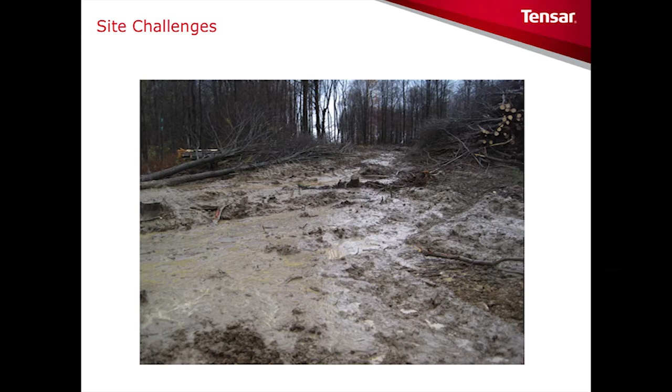When you get to your site, you know exactly where you need to be with your drilling, and you encounter issues like this. Here we see a lot of water content and a very weak subgrade, and you're going to compound the challenge here by putting a heavy load on top of it. So how do we handle this? You also may be in areas where you have high water tables, which also compounds this challenge.

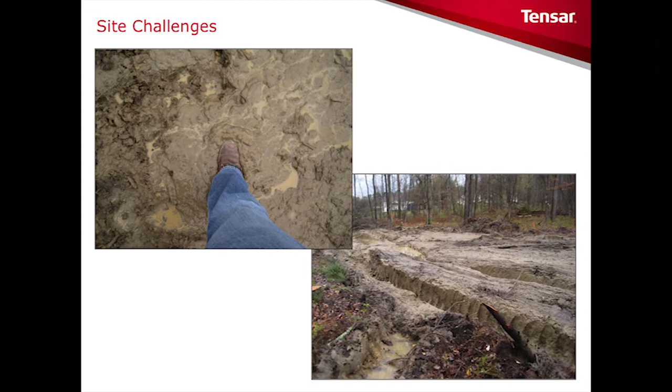Here are some other images that express what we're talking about. These soil conditions, you typically can't stand on it, you can't put your weight on it, and it usually results in heavy rutting, as seen in the bottom right corner picture. How do we handle these? Well, there are conventional ways to handle it, which you all are very familiar with.

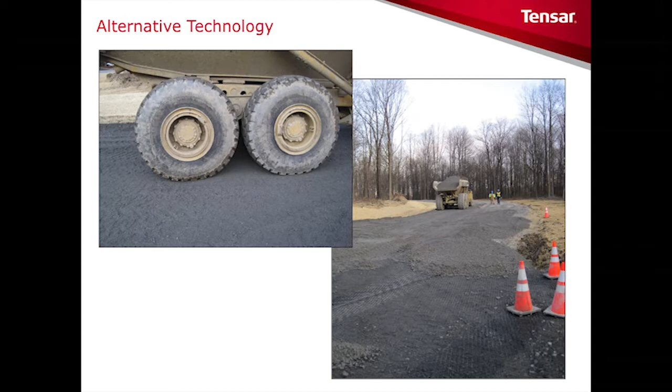But today we're going to talk about an alternative technology that will result in these types of images and solutions, where you can drive very heavy loads, whatever's required at your site, on top of these sections and these working surfaces to drive productivity, to decrease the environmental impact, and to really lessen the wear and tear on your equipment. This is just another shot that shows probably a local road to a drilling site that's common.

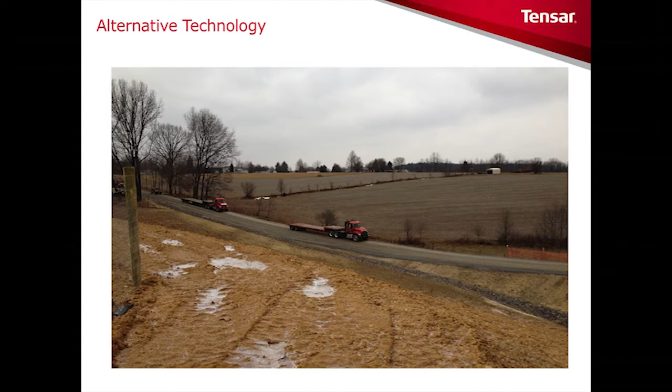And in all of this, with these solutions, we started and we're deep rooted in the public roadway sector. Our company history is around 30 years in this technology, and so we will address the partnership between how we take these solutions from the public sector and local roads to you at the drill pad. So what are we talking about? What is the alternative solution?

we're solving the problem. So here I actually have a piece of the triaxial geogrid, and it's important to know that this is just a sample, but it's very lightweight material. It's a polymeric material, and it's produced, just to keep it short, by extruding resin into a sheet and punching holes in the sheet and then drawing the sheet in several directions. And when we draw the sheet in those directions, the polymer chains align and gain strength, and that's how the grid is produced and how it performs so well.

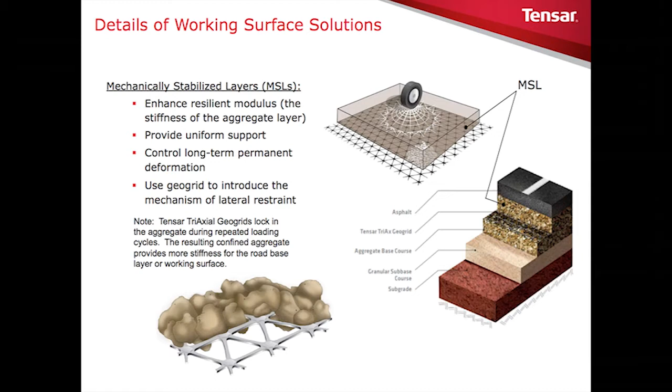We're going to dive a little bit deeper into the technology. How does the grid work? What do we mean by confinement? There's a tremendous amount of third-party independent research on our grid and our products, and we do that so that we can design with confidence.

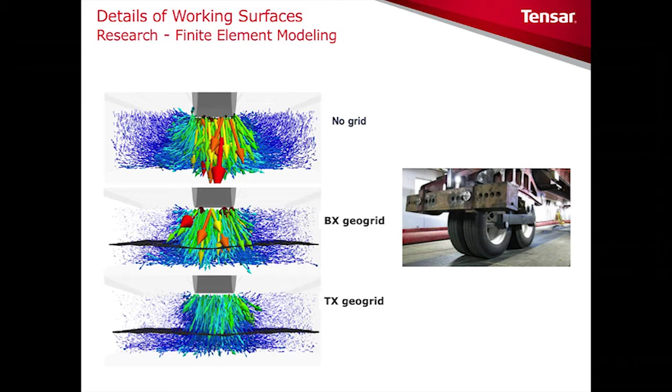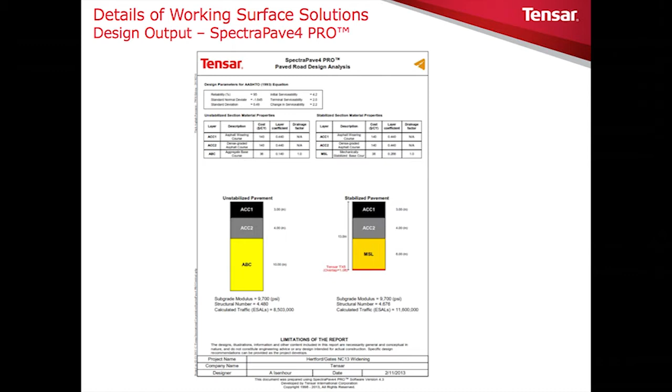On the left you see a cross-sectional area of an existing roadway section with thicker layers, and on the right you actually see the enhanced performance which drives a thinner section using triaxial geogrid and a mechanically stabilized layer. There are other tools that we use in our design team. Tensar has a design team that helps support our customers out in the field. You simply provide us with details on your site with geotechnical reports, loading conditions, the equipment that you're using, and we can help with the analysis.

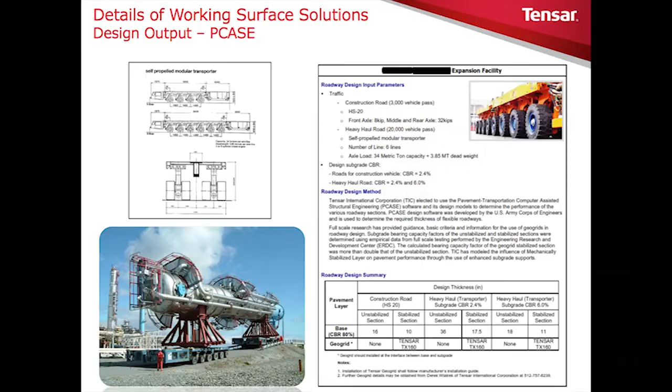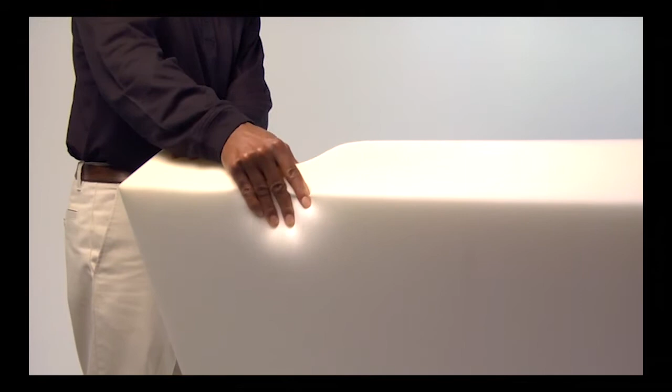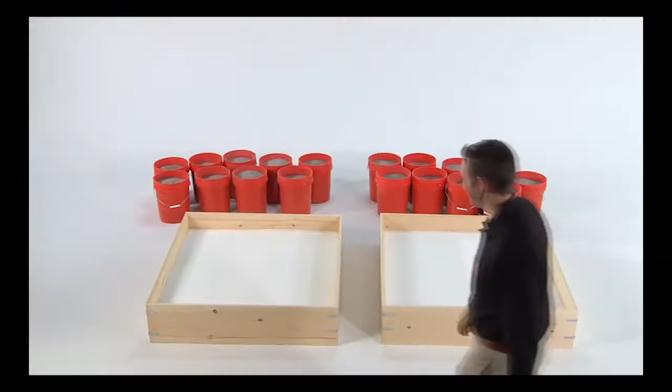Now we'll come to some videos that demonstrate this technology further, both through a conceptual visual and then at a real site on how it actually works. Here we have a demonstration video that we call our sandbox demonstration. The purpose and intent of this video is to demonstrate bearing capacity and the additional bearing capacity and performance that you can realize with triaxial geogrid. From a practical standpoint, this is for visual purposes only, but we'll follow this video with a video from the job site that shows this bearing capacity performance in action.

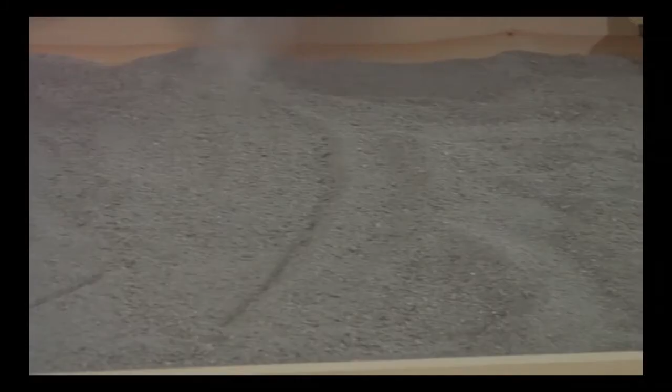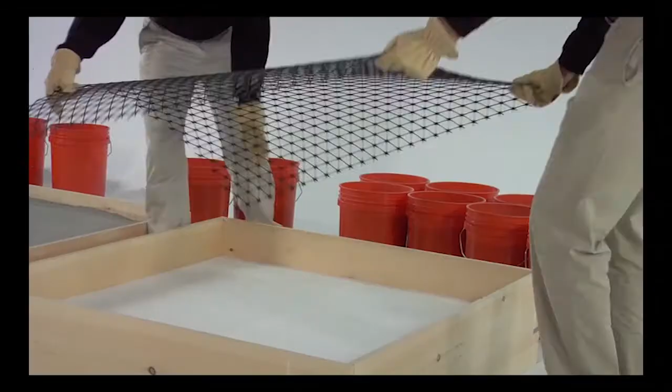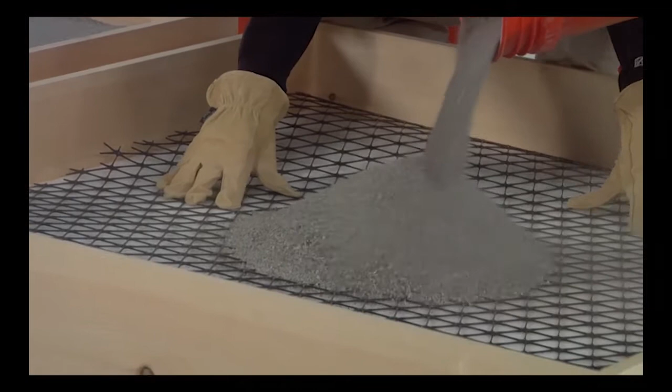So what you see here is two boxes. One we will have no triaxial geogrid in, and then the second on the right will have the triaxial geogrid, so that you can see the difference in performance between a control and a section that's been stabilized with triaxial geogrid. To simulate a soft subgrade, we've used memory foam in the base of the boxes, and that's what you see here. Next, we add the aggregate, just like you would in the field, right on top of the compressible or soft subgrade. The grid's added to the box on the right.

Next, we add the load. In this case, we're simulating a man walking on a soft subgrade. He moves from the unreinforced control section onto the section with TriAx geogrid, and the performance is apparent.

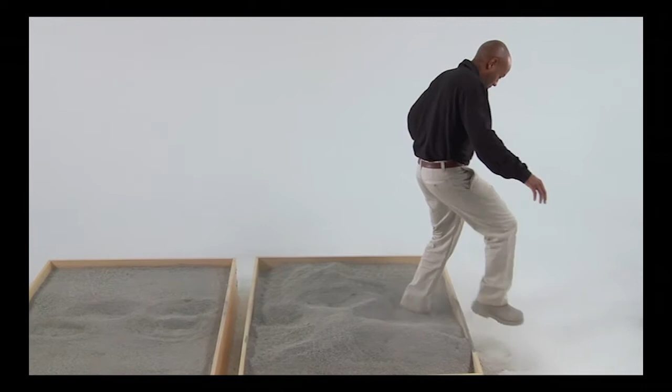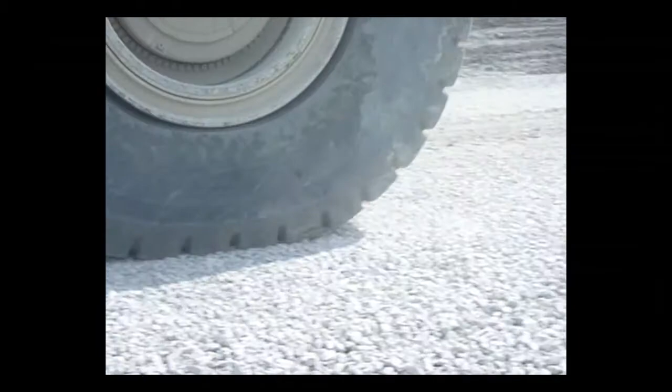Okay, let's take this concept to the job site. What you're seeing now is a pretty heavy hauler on a haul road that's 12 inches thick, 12 inches of aggregate directly on top of triaxial geogrid. Not a lot of movement as the wheels pass. You'll soon see him drive off the end right there, and that is what happens without the stabilization of TriAx. Very common. We see this all the time with our customers in the projects that we work on.

Let's review quickly the benefits of this alternative. First, we've got the cost savings, and what we're talking about there is the reduction of the thickness of your working surface up to 50%. Increased sustainability. This is delivering more durability and performance out of a section stabilized with TriAx than with a control section with nothing, conventional methods. And that can help with your workovers. Any site that we need to return to in the future, you don't have the maintenance issues that you would normally think of.

Less time. When we're taking aggregate out of the system in the quantities that we've talked about, it really does have impact on the construction schedule, getting to production earlier. Less aggregate. Here's where we talk about environmental stewardship. The magnitude and scope of the jobs that we work on literally save hundreds, if not thousands, of truckloads of aggregate on a given site. And that's important to reduce the carbon footprint and overall environmental stewardship on job sites.

Finally, all this put together, we're developing solutions and a design alternative that helps reduce risk. It helps create a stiffer platform, a mechanically stabilized layer that reduces maintenance issues, rutting, wear and tear on your equipment, and speeds up your access to production.

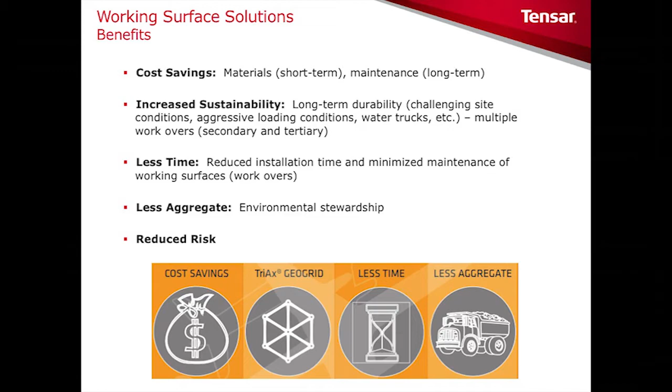So, John, before we turn it to Keith, I'd like to ask you, what best practices are implemented with new and current roadways? That's a good question. The benefit for this particular market is that we have three decades of history in the road design business, both public and private. So with this history in the roadway market, we're bringing that directly into the oil and gas market with proven experience, proven performance, and so there's not really a lot of trial and error at this point. We've vetted all of that, and you're going to hear about other best practices relative to installation, what actually happens on the job site, from Keith.

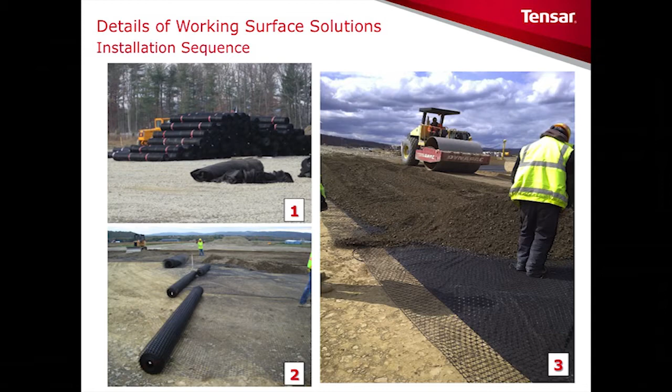But typically we find best practice is to roll it out a little bit at a time, put your aggregate down, spread it, and then roll out a little bit more and proceed with your installation. Let's look at a project up in Carrollton, Ohio. This is the Rex Energy Ocel well pad site. This is a finished picture, and we're going to go back and talk a little bit about this job.

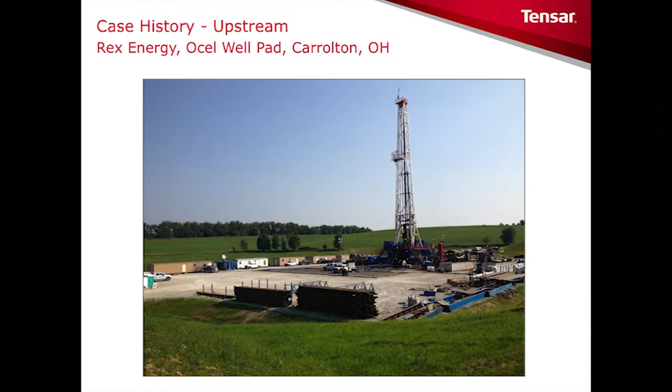In this particular job, the owner was very concerned about the durability of this site throughout the harsh winters in Ohio. And they were also concerned with saving initial cost. And so we started this project utilizing a product called TX160. This is an access road to the site. And they needed to make sure that they built a road that would sustain the traffic during construction and then to maintain the well site throughout its life.

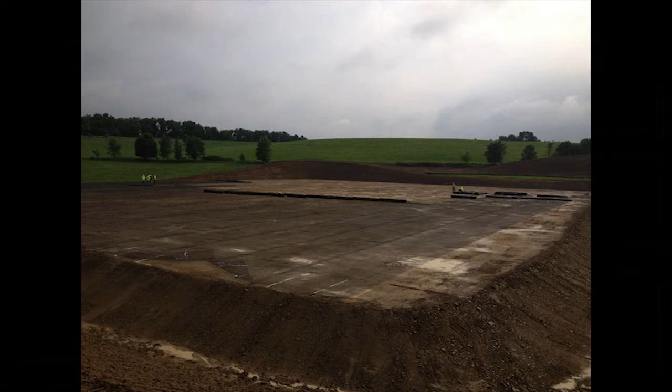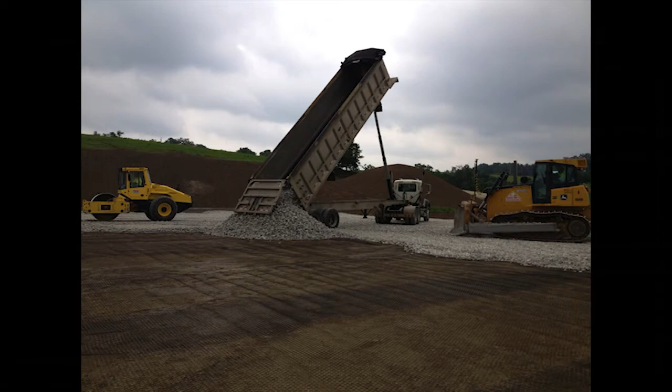They then built up the pad, as you can see here, and began the installation of the Tensar GeoGrid. You can see that on this site they decided to roll out the majority of the grid prior to any aggregate placement. Then they came in with their aggregate trucks, back dumped directly on top of the TriAx GeoGrid, and then they spread the aggregate and compacted it using small dozers.

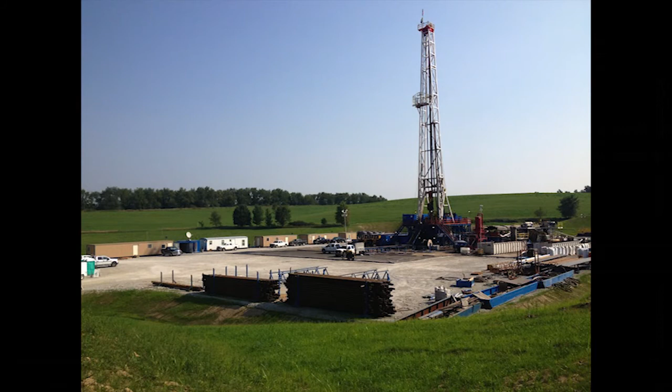Now on this project, this is what it looks like in a finished state and in operation. On this site, they reduced the amount of aggregate from 18 inches down to 8 inches. So they cut 10 inches of aggregate out. And the savings to the owner on this project was approximately $250,000.

You'll notice that the loading conditions on this site were very high. They were using a Hyster 700H forklift, and that forklift exhibits a load of 150,000 pounds on the front axle. And so being able to bridge that was critical. Additionally, the owner had concerns with maintaining a good solid working surface.

When you're carrying pipes throughout one of these yards, if you hit a significant rut, and a significant rut in this application is say 2 to 3 inches, you run the risk of dropping the load of pipe. And you drop a load of pipe, that could easily cost the owner hundreds of thousands of dollars in lost product. So they wanted to make sure that they had a good maintained working surface, which is also critical on drilling sites. So far on this project, we have supplied over 550,000 square yards of GeoGrid.

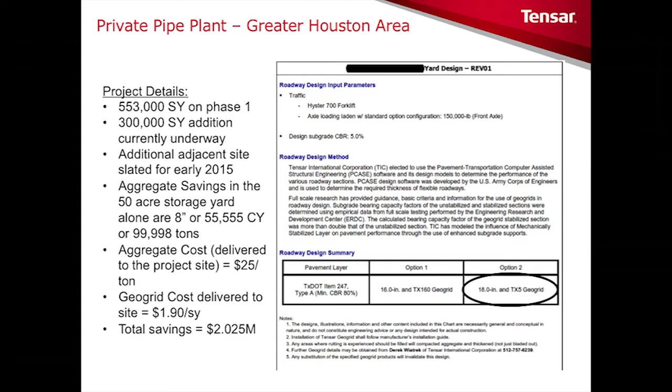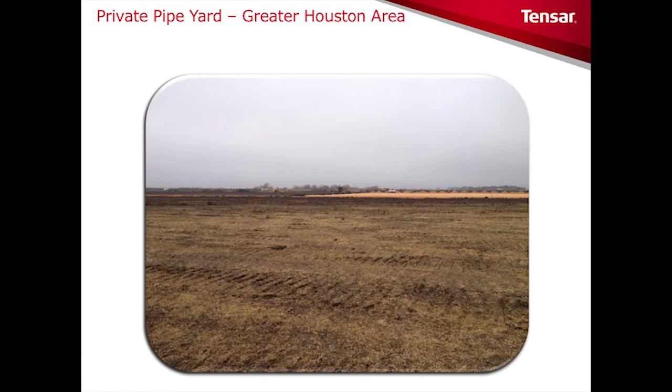On this site, they had a lot of unique loads, including what we call an SPMT, which is a self-propelled modular transporter. They were utilizing this to bring in a lot of their heavy equipment, and they needed to make sure that their haul roads were able to sustain the loading from these unique pieces of equipment. On this site, they actually utilized a little bit stiffer product than on the other one, called TX160. And they utilized approximately 300,000 square yards of material.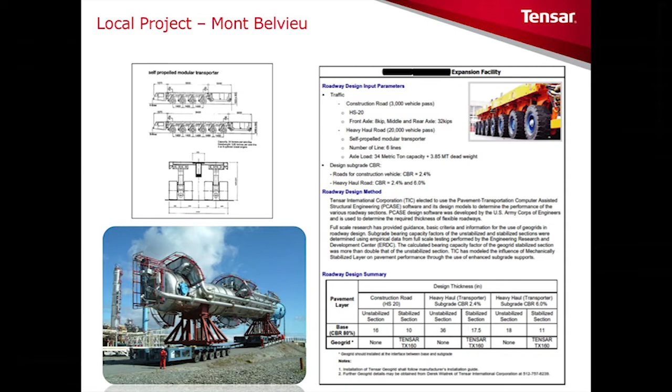So here's a picture of the installation on this one. Unlike the other project where they rolled a little bit of grid out at a time and spread the aggregate, this contractor chose to roll a very large quantity of grid out all at one time. So they rolled it out, and then they brought their aggregate in and spread it appropriately across the site.

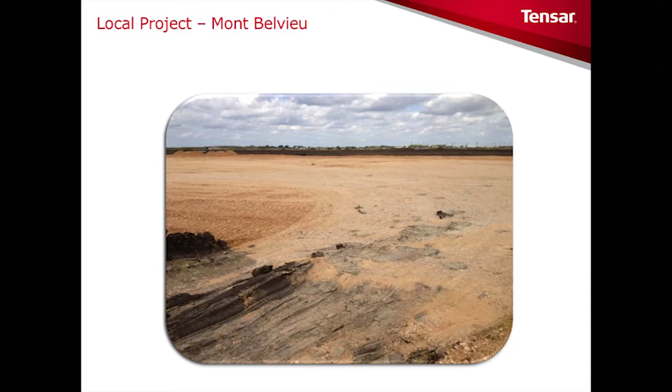And to give you some perspective of what this site looks like without the GeoGrid and the aggregate, here's a picture of the entrance to this yard, and you can see the significant rutting that they would experience. And keep in mind that this is just under highway legal loading, and so you can imagine what that would look like if you put an SPMT that can support hundreds of thousands of pounds.

Very informative, Keith. Thanks a lot. Can you give us an idea, in summary, what kind of aggregate savings you see using GeoGrid? Yeah, absolutely. It's not uncommon on these sites, depending on the original thickness or the unreinforced thickness, to see savings of 40 to 60% of the aggregate.

And if you're in an area where aggregate is not very readily available, where you either have to bring it in on rail or in some cases on the barge, aggregate costs can be substantial. And so if you can save 40, 50, 60% of the aggregate on these sites, it relates to a significant cost savings. And not only a cost savings from the standpoint of financial dollars, but the cost savings of negative publicity from an environmental standpoint.

And that's an excellent point, because that's one of the things we hear, especially in some of the new areas of drilling these days for the shales. People aren't used to our oil field trucks, and they are very critical of how we destroy their local roads. So thank you again, Keith.

And folks, this is clearly not traditional oil field site access, but never fear, we have a longtime industry veteran to point out some important advantages. Our next speaker, Clark Holmes, joined Tensar as Oil and Gas Business Development Manager following a 35-year career in the upstream industry. After college, Clark learned the nuts and bolts of engineering, manufacturing, and installing a wide range of drilling and completion equipment.